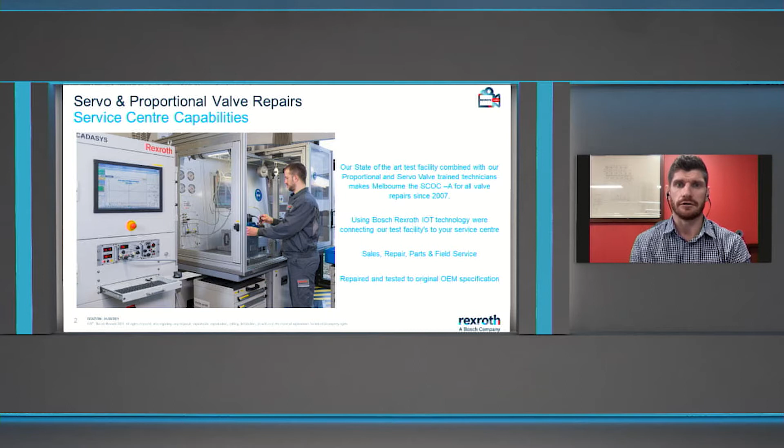So an introduction into servo and proportional valves.

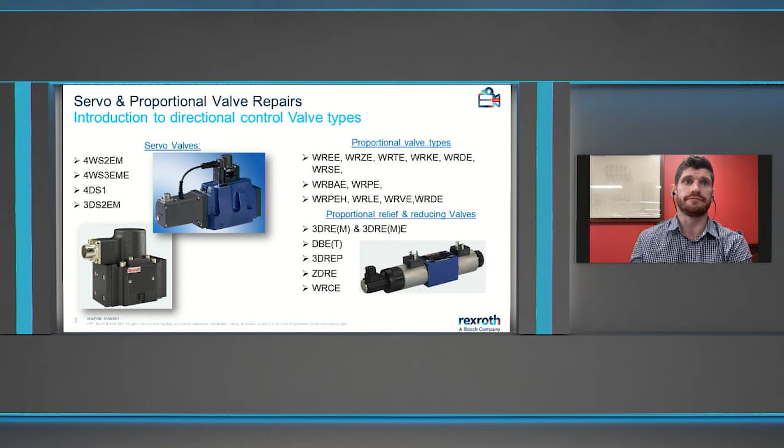So before we start any disassembly and assembly of the servo and proportional valves, we undertake internal performance tests to understand how much leakage there is within the valve. There's not much point in stripping a valve down, resealing, assembling, just to find out that it's got too much leakage and it doesn't work, essentially.

So we do 5 tests: an electrical test, a spool position feedback test, an internal spool leakage test, a gain test, and a gain flow test. Over the next few slides, I'll take you through individually what each of these tests means.

So the electrical test is our first test, which is essentially just an electrical functionality test, where we're putting a command signal into the valve and making sure we've actually got electrical functionality of the valve. Once we have that and we know the valve is working, we would then conduct a spool feedback test to make sure that the feedback from the spool is matching the input.

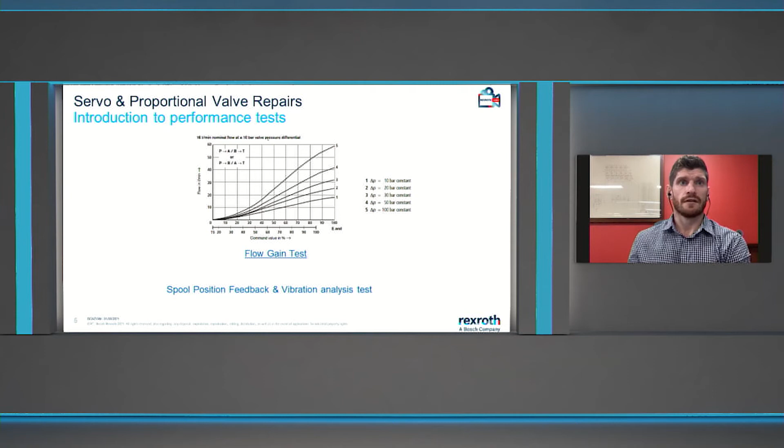So now we move into the repair process, once we've completed those tests. The repair process for the servo and proportional valves is similar, but there are a lot more components to a servo valve. Essentially, with disassembly we're looking to remove all the internal spool components from the valve, putting them through the ultrasonic cleaner, sometimes with the body of the valve, and then removing the LVDT and the adjusting piece in the coil, giving them a thorough examination. Once we're happy with those, we're assembling the valve with genuine Rexroth components, installing the LVDT and spools back into the valve, and then we move on to calibration.

Calibration in both repair processes is the most important part for us. In the proportional valve, we're setting up the LVDT. This is calibrated through the end adjustment screw of the LVDT, and also adjusted through the adjusting piece on the magnet. The only test we complete once we've adjusted the center position of the spool through the LVDT is a flow gain test — testing the flow through the valve at the input signal. That's the repair process of the proportional valve.

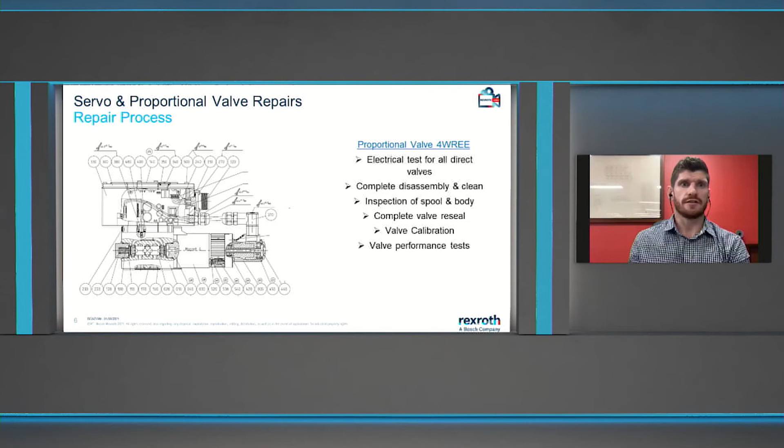The repair process for a servo valve is a lot more in depth and takes more time — about 8 hours for repair of a servo valve, compared to 4 hours for a proportional valve. Again here, stripping the valve down, getting the spool and sleeve out of the valve, removing the electrics from the valve, and then we move from there.

Once we get that stripped down, the internal components go into the ultrasonic cleaner. If we're putting a new spool and sleeve into the valve, we use genuine Rexroth parts and genuine Rexroth seals, and then calibration starts.

Calibration of the servo valves is mightily important for on-site performance. We're looking at an input pressure of 140 bar delta P. The first set point is reached through the main jets at 35 bar, which we test through a test port. From there we do fine adjustments of the secondary jets to align the feedback arm, which is connected to the spool and actually controls the valve. As the pressures become imbalanced through the jets, that's when we get movement of the spool. We monitor the position of the spool on the servo valve through an A and B port flow meter, and then we do a flow gain test for repeatability of the center position of the spool.

That concludes our repair process.

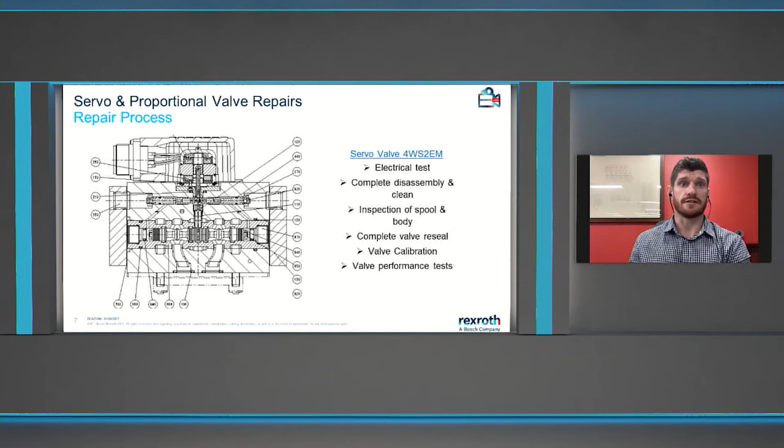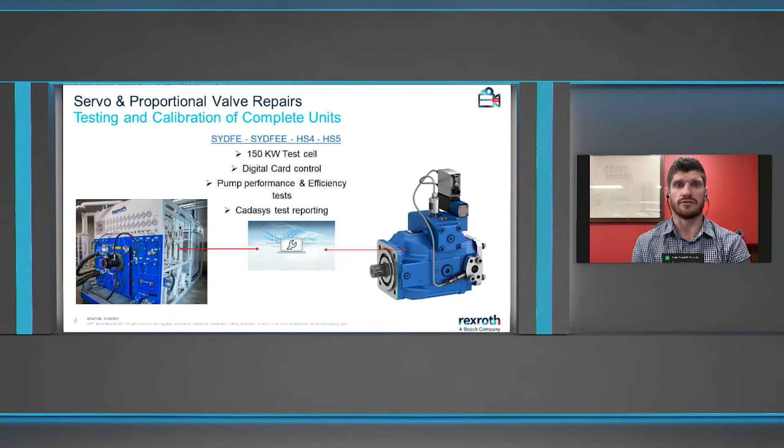We test this with a digital card — a VT, VP, CD — running it through a laptop with the Bodac software. We download the firmware from your drive card onto our laptop and then drive the pump using the internal parameters from your amplifier card. From here we complete the standard efficiency test you'd see in all our service centres: mechanical and electrical null, full stroke of the pump versus swash plate feedback — that's input versus feedback — and full pressure versus pressure feedback, which you can see there, measured by the signal transducer on the side.

Our main products are industrial power units and industrial valve stands with a lot of proportional and HS4 technology. Also, press manifolds are an interesting one. These vary in size from size 6 to size 80 for logic and proportional valves, so there's no valve too big or too small that we can't do here in Melbourne.

To finish off, the industries we're seeing include injection molding and blow molding, which was a big one for us with complete machine control and proportional valves, but that's now phasing out. Agricultural machines, obviously John Deere with our A10 pumps and swash plate feedback, we're seeing a lot more of those come through our service centre.

Mobile, marine and shipping is a worldwide industry with a lot of proportional and servo valve control. Food processing, steel recycling, rubber recycling and paper recycling are all using Rexroth proportional control. And obviously a big one around the world is metal forging, roll forming, and also construction materials, mineral sands, concrete, cement, things like that.

Anyway, that's my presentation concluded. Thank you for your time.

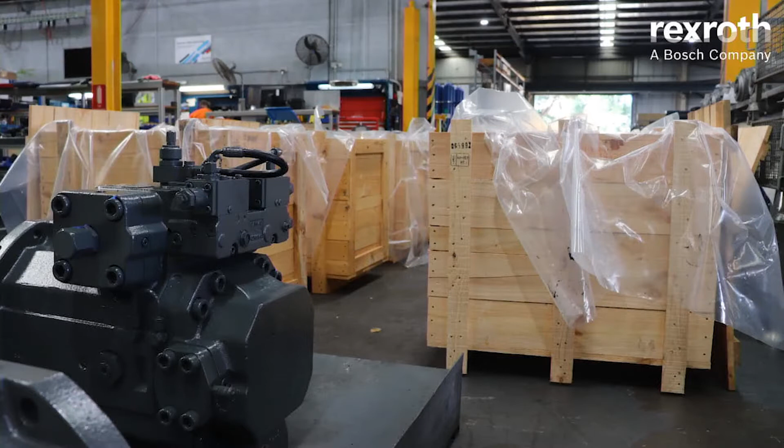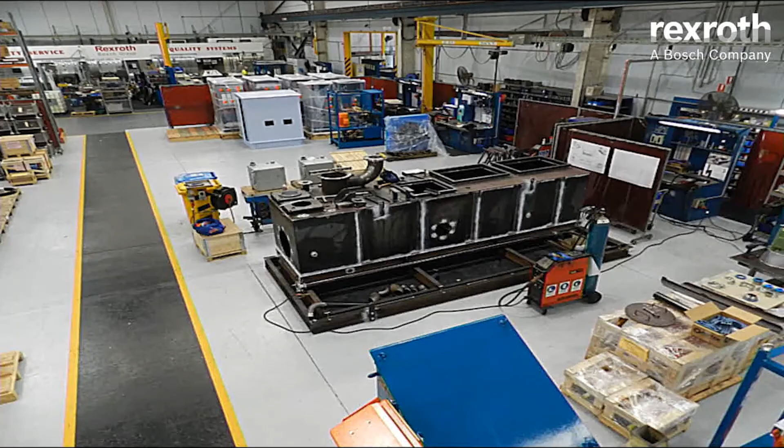Here in our Sydney Repair Centre, we sell spare whole goods and parts. Australia-wide, we have a very large field service team, and we can help you with breakdowns, preventative maintenance, or modernisation projects. If you have any questions or inquiries regarding hydraulic service in Australia, please don't hesitate to look us up.

So that was the Sydney Service Centre. And Australia is huge, I wonder where else on the continent Bosch Rexroth Service Centres are located. Let's find out. As you can see, we are now connected to Paul Taylor from Sydney.

Hi, Paul. Hi, how are you? I'm great. And it's great to have you here, Paul. Do you mind sharing your designation and where you're standing, Paul? I'm still based in Sydney and work in the service sales department in New South Wales.

We were just shown the Sydney Service Centre. How many more of these facilities do you have in Australia, Paul, and where? As Jeff said in the video, we have 9 locations. They're all located on the east and west coast of Australia. We have our major service centres in Melbourne, Sydney and Brisbane on the east coast. We have smaller service centres in Adelaide, one to the north of Sydney in Newcastle, and in far north Queensland in Mackay. Over on the west coast, we have our major service centre in Perth, and a smaller one just south in Bunbury, then in the northwest in Port Hedland.

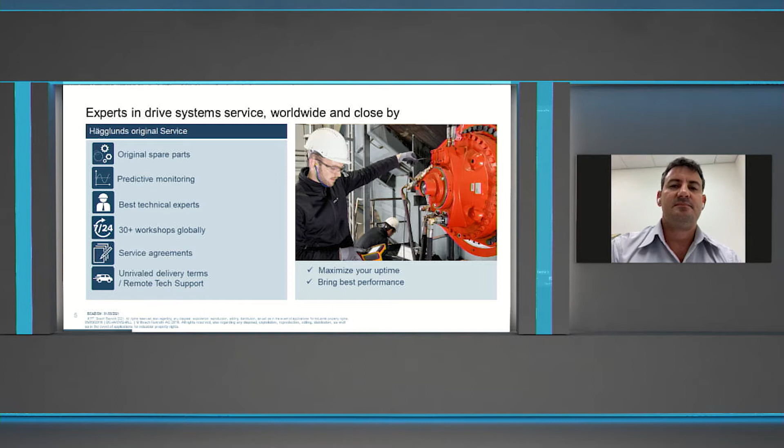Next slide, please. So essentially, we can look after the whole system from conception all the way through commissioning, servicing, condition monitoring, repairs of the systems, the components, all the way through its life cycle. We also offer training to our customers, so need-specific, drive-specific training. And we also keep a lot of dedicated spare parts for the Hagglunds product on the shelf. And we also have service exchange on some of the products.

So next slide, please. So for the motor repairs in Australia, we can repair any of the Hagglunds motors. As mentioned before, Brisbane and Perth are the repair centres for the HD product, and this is where all of the bigger motors get sent to get overhauled. So we can do absolutely any Hagglunds product in these two service centres. Next slide, please.

Also with that, the pumps. So Brisbane and Perth, we can repair all the pumps, the smallest pumps all the way up to our biggest pumps, which is the Hagglunds SP 750. And we can do them also in Sydney, and a few other little branches can do the smaller pumps. Next slide, please.

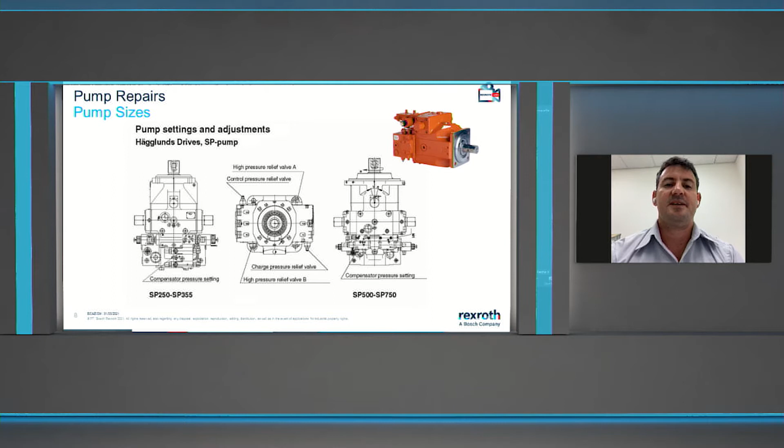The customer also has access to this portal. You can look on, it has a machine health index, so you can trend your machine's performance ever from the point you put it on to now in its lifetime. Next slide, please.

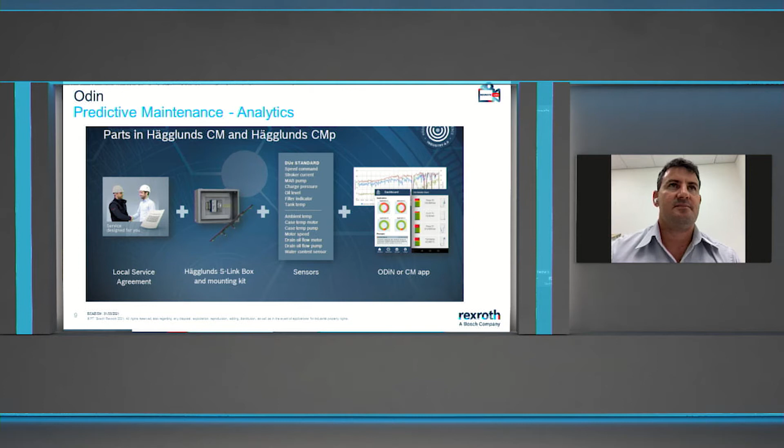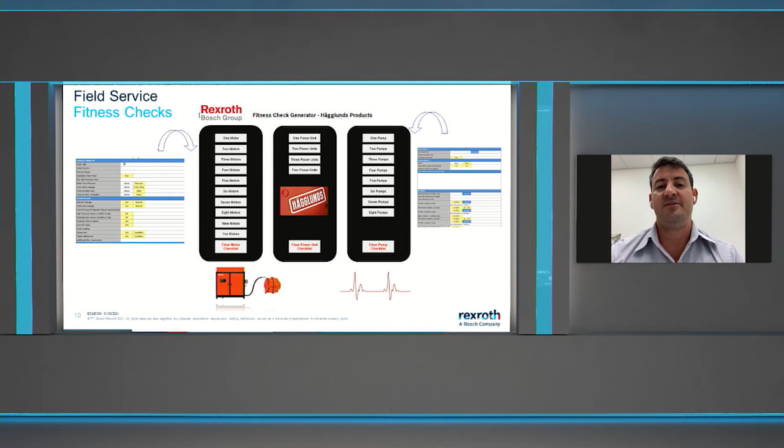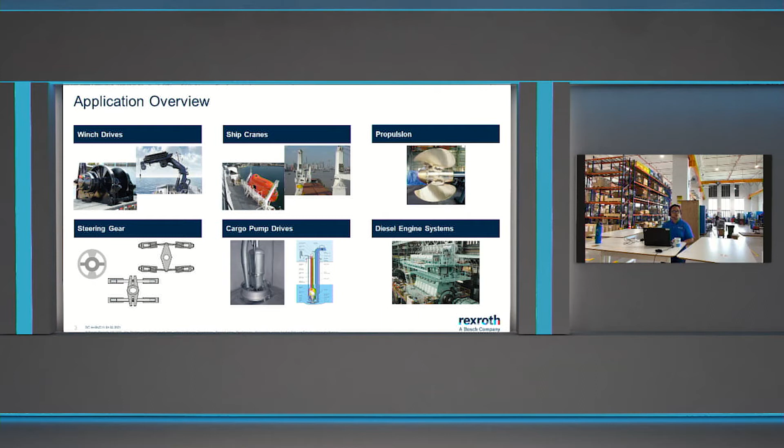These are typical A4VSO pumps, and we'll use this pump as a reference for other models. Based on our experience and technical feedback from the shop floor, at 32,000 hours, or 5 years of operation, the pump is in somewhat good condition. There are a few marks of cavitation starting to show at the control plate, but the bearings and rotary group are still relatively in good condition. Of course, this assumes the oil is clean without contamination, and the viscosity of the oil is according to the required parameters. But let's take a look at slide 6.

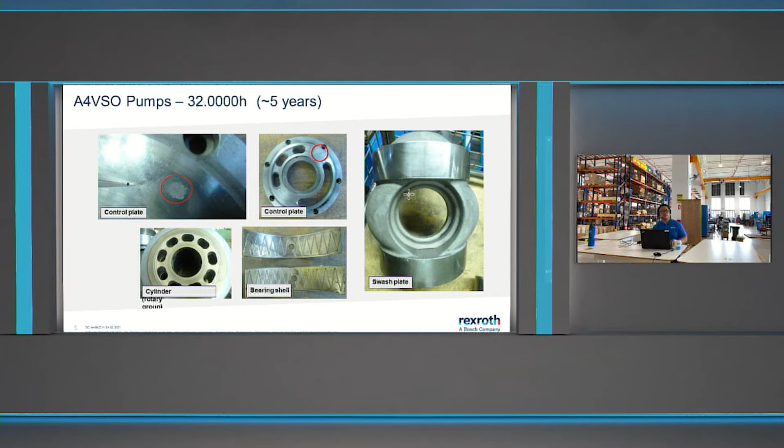At 64,000 hours, or 10 years of operation, heavy wear can be seen at the control plate, rotary group, swash plate, bearings, and the control piston. So now wear is more evident and visible than before, and it needs to be reworked or replaced to bring the pump back within the limits.

So we spoke earlier about other workshops offering cheaper options by just replacing seals and bearings. But at 64,000 hours, the pump is at risk of failure if we do not replace the wear parts.

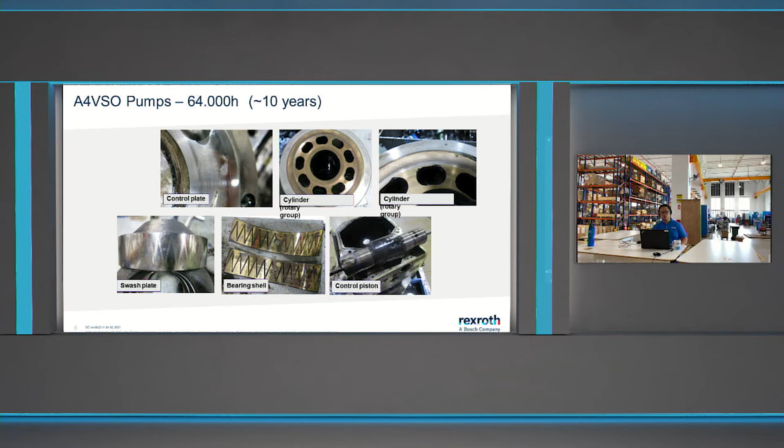Moving on to slide 7, I would like to show you this typical bathtub curve. It is widely used in reliability engineering. As you can see, at the 32,000 hours mark, it is still running at a constant failure rate. But once it hits 64,000 hours, there is an increased failure rate. Simply changing the seals and bearings only will not work.

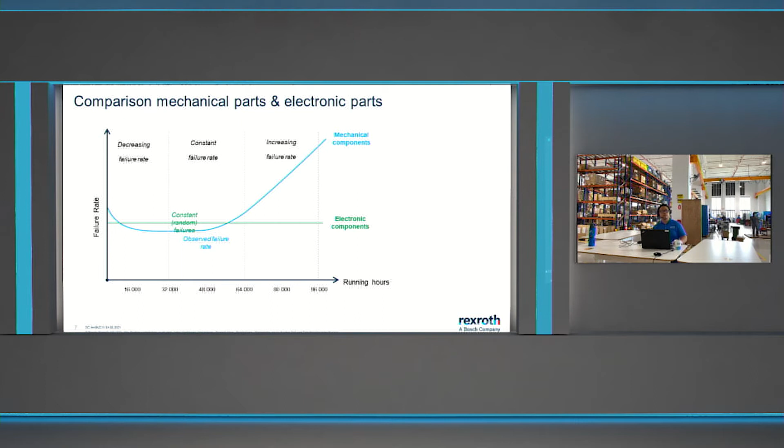Slide 8, please. So we do offer 4 repair packages here in Marine Repair Center. The overhaul basic, where only the bearings and seals are replaced. There may be some risk of electronics failure, but this is for customers who are on a very, very tight budget.

Next slide. As you can see in the overhaul light package, those highlighted in blue are the parts that will be replaced as part of the package. That means bearings, seals, and electronics like the transducer and proportional valve.

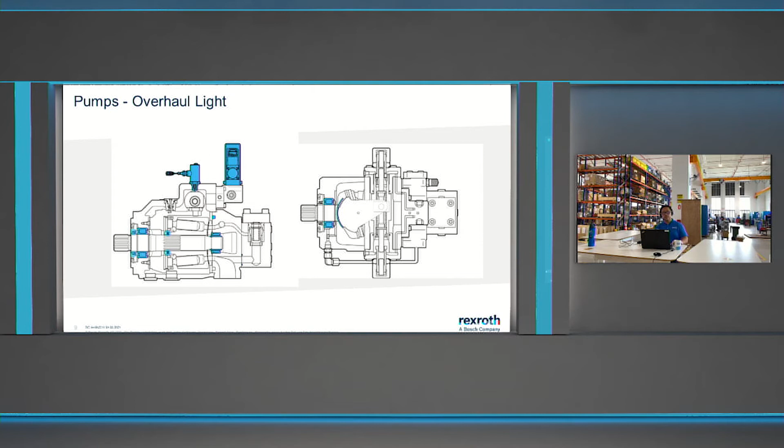Slide 10. Moving on, in this slide, besides those in blue, the core parts of the pump will be replaced if showing signs of visible wear. So in that sense, it will be more economical for the customer if the pump is really in bad condition. Slide 11.

As you can see here, we also have the reman packages. In the reman package, all of the internal parts are replaced, and only the pump casing is used back, so the pump will work as new. We are offering 2 years warranty for reman, 1 year for overhaul flat package, followed by overhaul light.

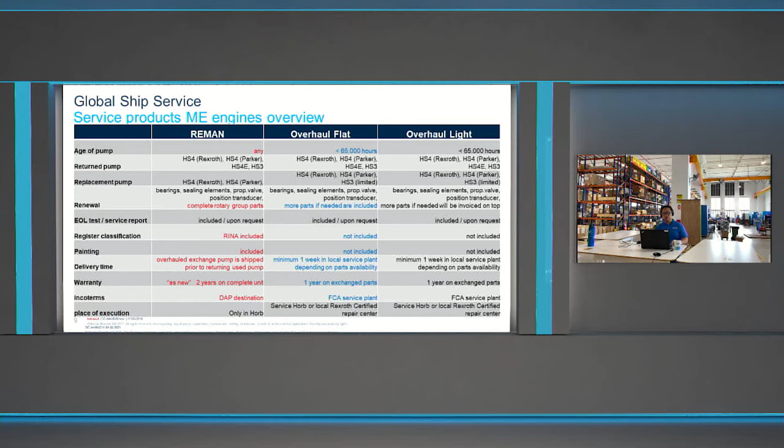Next slide, please. At the back of these packages, we have a centralized warehouse in Nuremberg, Germany. The warehouse ensures that the A4VSO pump spare parts are on stock most of the time. Any stocks that are depleted will be replenished accordingly, and we will indent the parts, which takes approximately 2 to 3 weeks to get into Singapore.

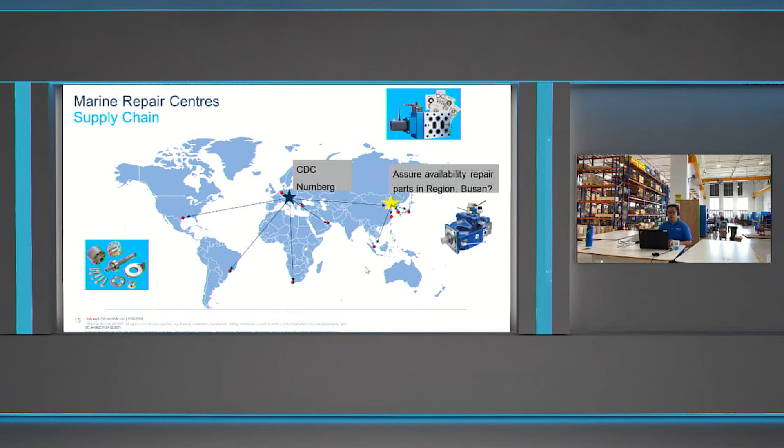So for now, I've just finished my presentation. Maybe we will have a short tour to our workshop. Cameraman, thank you.

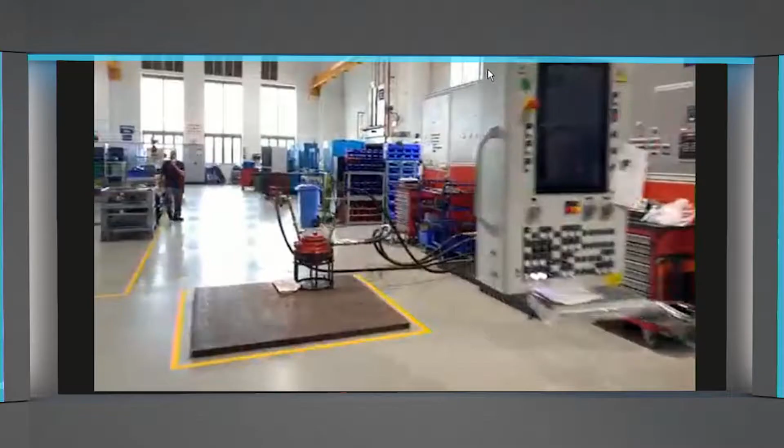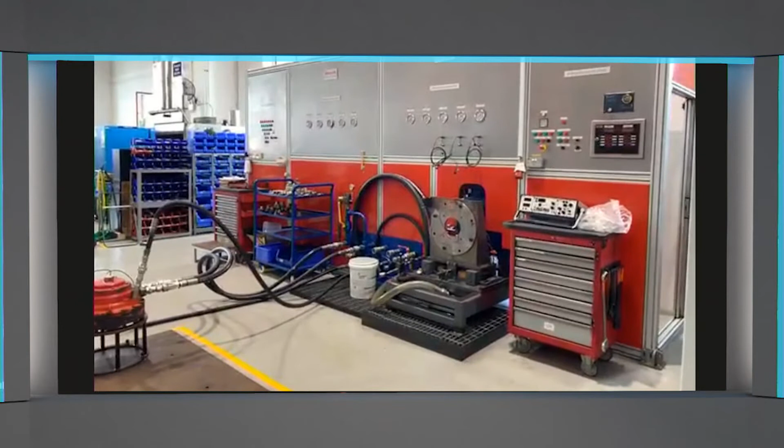And you see the next station in red, this is actually our Hägglunds test rig, where our Hägglunds motors are tested. We will try to simulate extreme parameter conditions to make sure the motor is repaired and tested properly before giving it to the customer.

Over here, we have a washing machine where all the parts will be thoroughly washed and cleaned. This is to prevent any contamination before we assemble the pump.

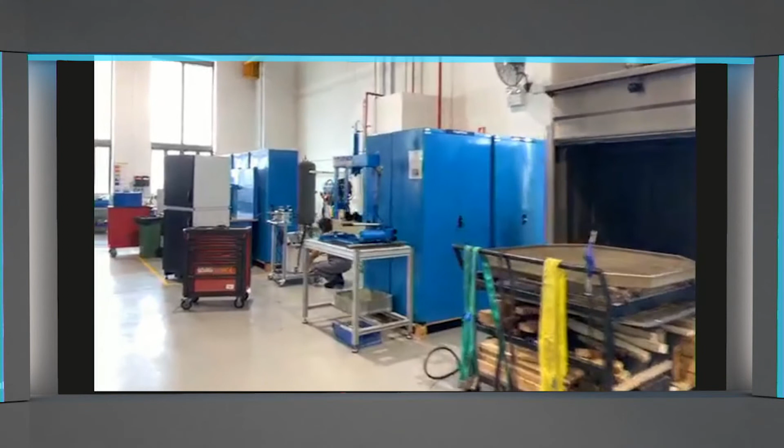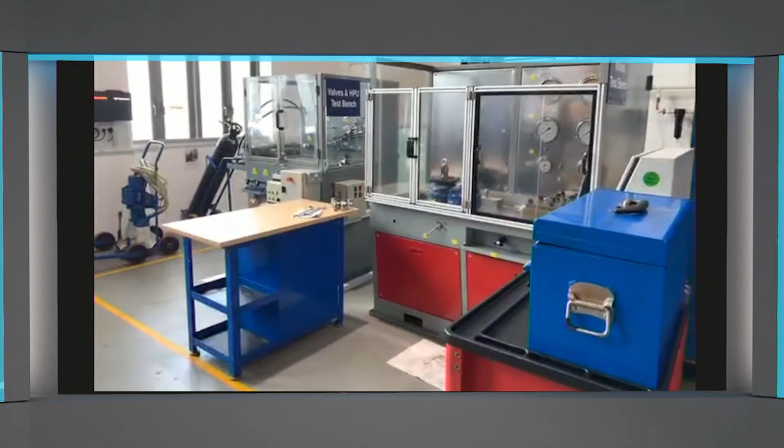So at this corner is where we test our valve. This is a test rig specifically assigned for testing valves. As you can see, we have a lot of test rigs designed and assigned specifically to components for repair.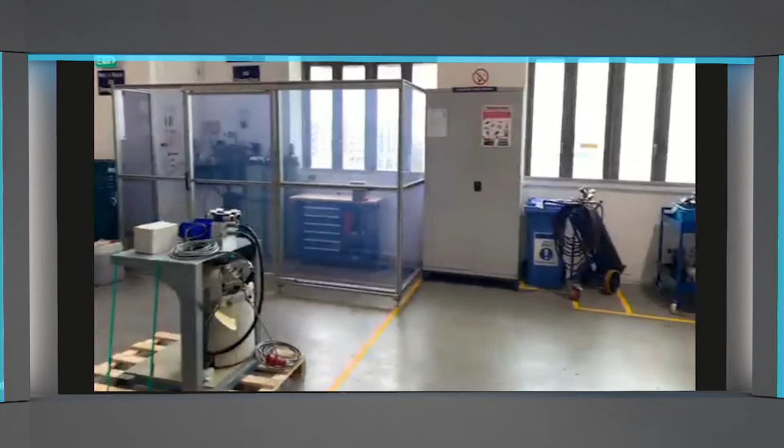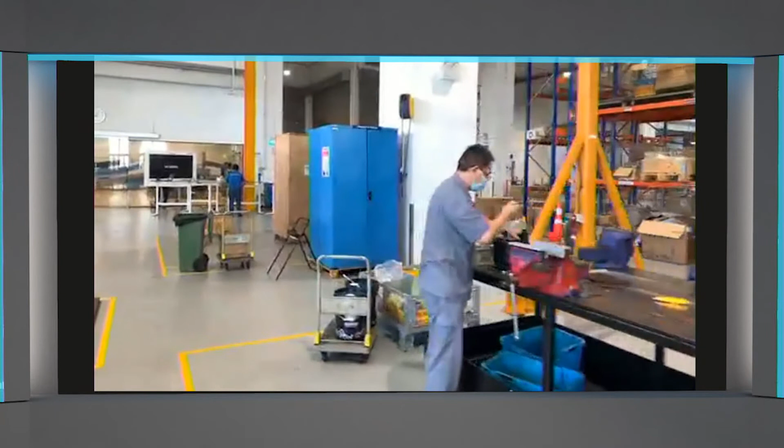Moving along, you can see our inventory on the right side. This is where our workbench and our workers are working on some repairs at the moment. So if you sign up with some repair packages with us, we can also help you. If you have some other third-party brand, we are also able to help you with some repair.

So I hope, Inga, you have a good tour to our workshop. So Inga, back to you.

Thank you so much, Tommy and Roy. Seeing your setup, your cool working space, it's safe to say that you guys should have your own talk show. Titled Aquaman, maybe? Aquaman with the Bosch Rexroth cut. So, well, perhaps, yeah, thank you.

Yeah, you should. And please hang back a while, because not only are we going to visit Marine's Repair Center in Singapore, we're also going to visit service centers from the rest of ASEAN countries.

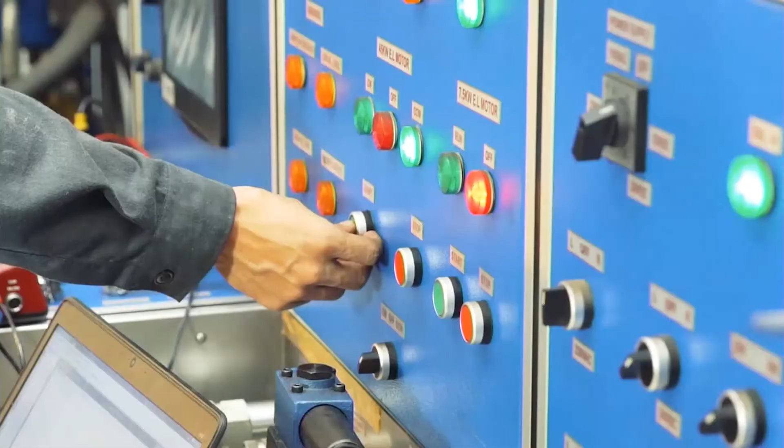So whatever you need, the original spare part, the technical support, or the site service from Bosch Rexroth, just call us. Don't wait. Count on Bosch Rexroth Service to keep your system and machine running.

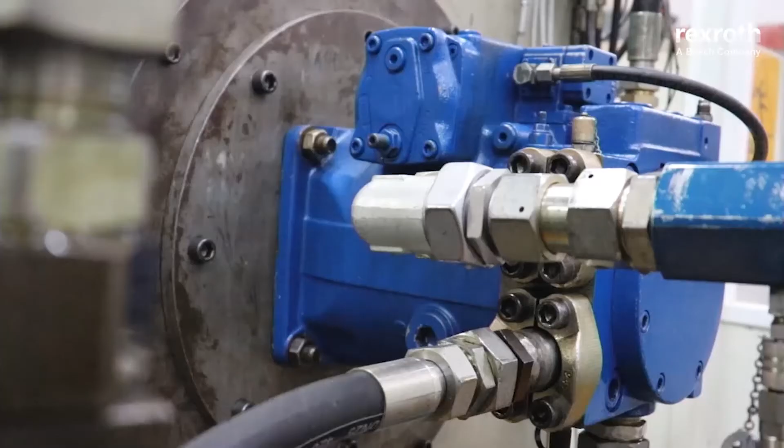Welcome to Bosch Rexroth Indonesia. I'm Yudi, I'm responsible for service and operation in Indonesia. We established in 2001 and we are now operating in 2 locations, first in Jakarta and second in Balikpapan.

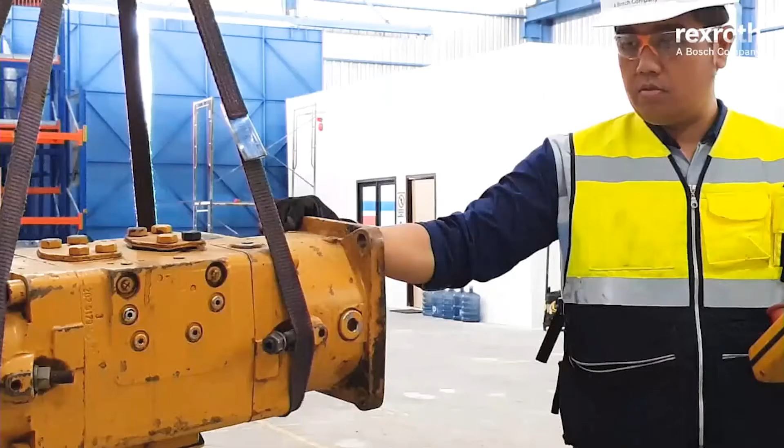In Balikpapan, we are focusing on mining and mobile industry. Meanwhile, in Jakarta, we are focusing on pulp and paper, marine, and other general industries. Currently, we are testing a big Hagglunds motor MB4000 for our biggest pulp and paper customer.

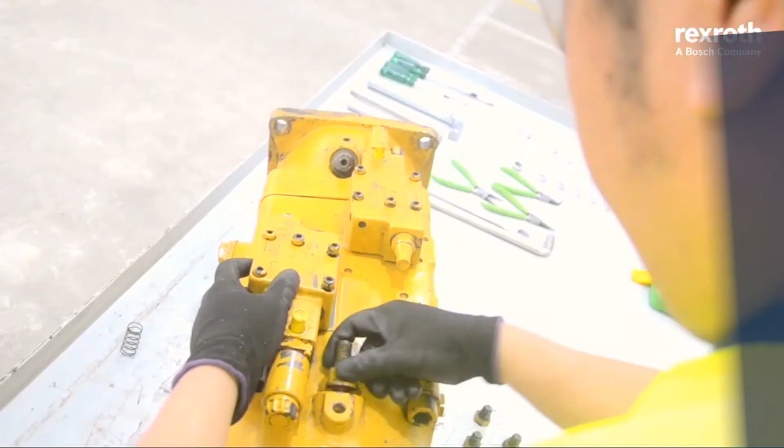Give a big virtual round of applause to Bosch Rexroth. Wow, they have service facilities all over every major country in ASEAN. And if I witnessed correctly just now, Indonesia also has 2 service facilities in 2 major cities, Jakarta and Balikpapan, focusing on pulp and paper, marine, mining, and mobile industry, all to ensure a great after-sale service for the customer.

And to add to this great after-sale service, Bosch Rexroth also offers service agreements. So next up, we want more from Yudi Heriawan, Manager of Service and Engineering from Indonesia, with use cases to show you how service agreements add value.

Yudi, my fellow Indonesian. Hello, apa kabar? I'm good, Inga, thanks for asking. Sure, can't wait to hear what you're going to say to us in this presentation. Yes, I would like to share some insight about service agreements, and some cases and examples of Indonesian customers. Great, looking forward to it. Okay, thank you.

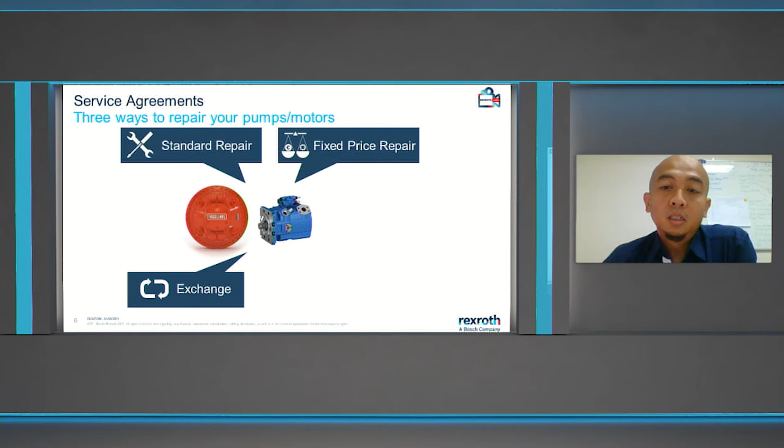The last one is unit exchange, where the customer can have a new unit in exchange for the damaged core, with terms and conditions applied as agreed with the customer. This is suitable for customers that have forecasted use of the pumps or motors across the year to secure the availability of units. But at the end of the day, the intention is always to make customers satisfied with our services.

As mentioned earlier, currently we get more inquiries on health checks or fitness checks, mostly from end-user customers. This health check service was first introduced by Hagglunds' team through fitness checks of the motor. Then we applied this also to a complete hydraulic power unit system. These approaches are really beneficial for high installed-base customers with limited manpower or basic knowledge of hydraulic maintenance. So basically we do a site visit to check the condition of the system, checking critical parameters, taking oil samples, and collecting all necessary information from the hydraulic systems.

And the outcome of the check is a full customized health report of the system. Actually, we have 2 different report templates: specifically for Hagglunds systems and for general hydraulic power units.

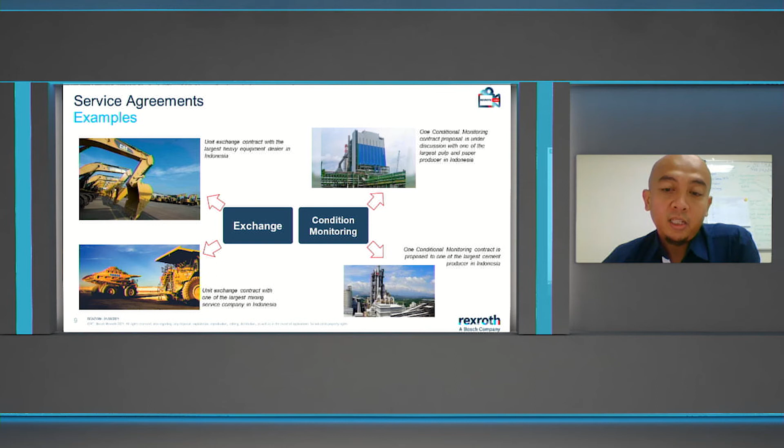Thank you. That is the end of my presentation. Go back to you, Inga.